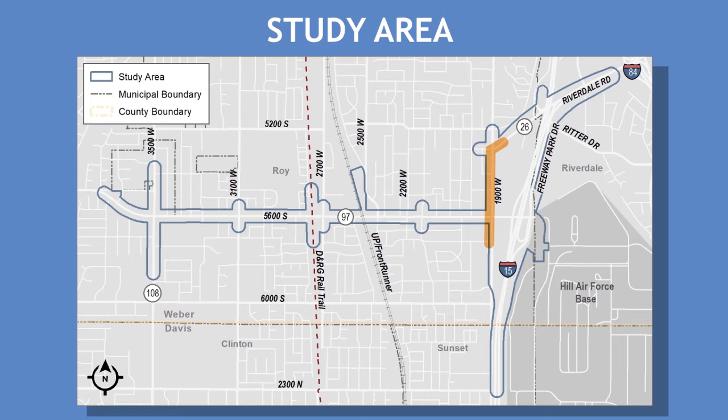The purpose of the project is to meet future 2050 travel demand on 5600 South and at the I-15 5600 South interchange, and to improve safety conditions within this study area. The project is needed because by 2050, major intersections such as 3100 West, 2700 West, 2200 West, 1900 West, and Freeway Park Drive would operationally fail during the AM or PM peak period if improvements are not made.

The project is also needed because UDOT crash data reports a high number of congestion-related crashes, and it is predicted that the number of crashes could increase by 2050 as traffic congestion increases. In addition, several pedestrian and bicycle-related crashes have occurred along the corridor. A goal of the project is to accommodate active transportation, or transportation that is powered by human energy, primarily walking and bicycling along 5600 South.

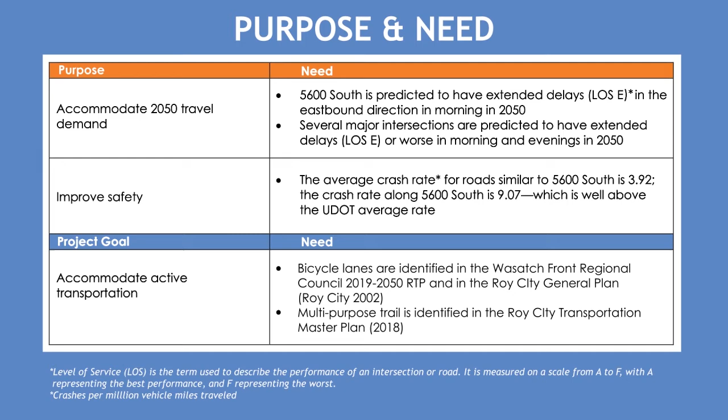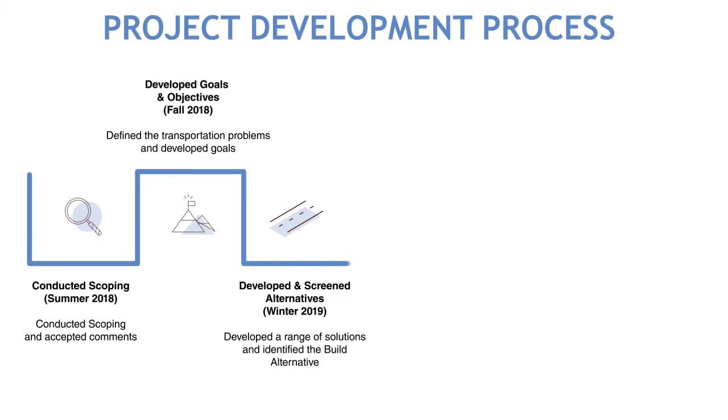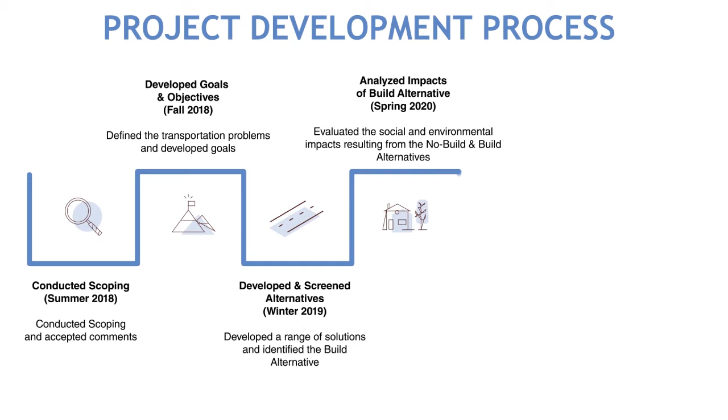Since the project scoping meeting held in 2018, UDOT has developed and screened alternatives to evaluate a range of design solutions. In fall of 2019, the team optimized the 5600 South alternatives to try to reduce the number of property and historic impacts. Identified a build alternative in winter 2019. Evaluated the social and environmental impacts from the build alternative and the no build alternative in spring 2020.

On June 23rd, UDOT published the environmental assessment for public view and comment. The public comment period is 30 days long and will end at midnight on July 23rd, 2020. Comments sent by postal service should be postmarked by July 23rd. The final environmental assessment and decision is anticipated in the fall of 2020. It will include response to public comments.

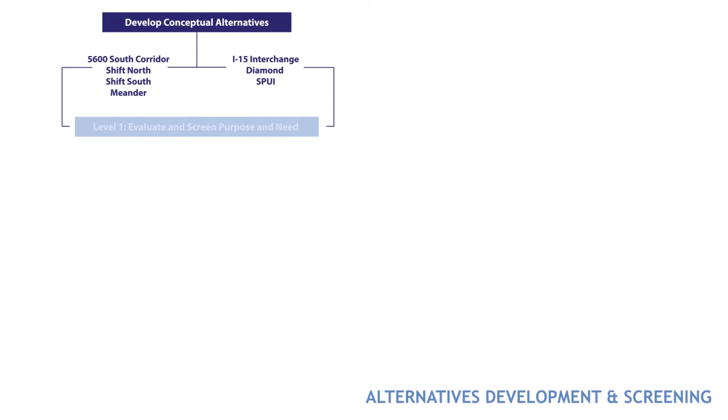UDOT developed solutions called alternatives based on the needs identified for the study area. These alternatives were screened against the performance criteria identified based on the purpose and need for the project. Level 1 screening evaluated the alternatives' ability to accommodate 2050 traffic demand and improve safety. Level 2 screening evaluated the remaining alternatives' ability to minimize Section 4(f) uses. We will define 4(f) uses later. Minimize acquisition and relocations, and ability to accommodate the project's active transportation goal.

In addition, UDOT evaluated a no-build alternative to provide a baseline for screening. The no-build alternative assumes the completion of all projects proposed in the Wasatch Front Regional Council 2019 to 2050 Regional Transportation Plan without improvements to the existing interchange or to the 5600 South corridor. You can find more details about this in Chapter 1 of the EA.

An evaluation of Section 4(f) properties was completed for this project. A Section 4(f) property is defined as publicly owned land of a public park, recreation area, or wildlife and waterfowl refuge of national, state, or local significance, or land of a historic site of national, state, or local significance. For this project, the historic properties were the focus of the Section 4(f) evaluation. This evaluation showed that there are no feasible or prudent avoidance alternatives to the preferred alternative. All measures have been taken to minimize harm to Section 4(f) properties.

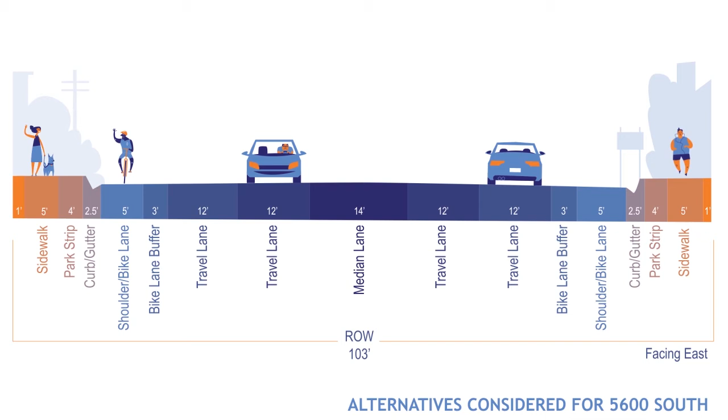All alternatives considered for the 5600 South corridor include the same cross-section as shown here, which includes an additional lane in each direction and added bicycle lane on each side of the road. Three alternatives along with the no-build alternative were evaluated along 5600 South.

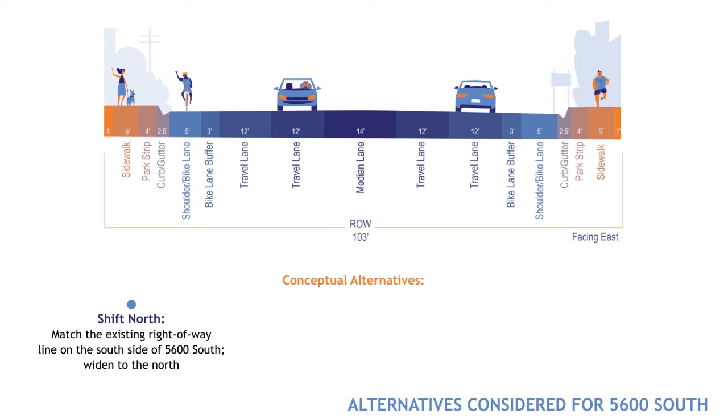The shift north alternative matches the existing right-of-way line on the south side of 5600 South and widens to the north. The meander alternative widens and shifts north and south to minimize property impacts to the extent feasible. The shift south alternative matches the existing right-of-way line on the north side of 5600 South and widens to the south. Using the identified screening criteria, UDOT evaluated how well each proposed alternative performed.

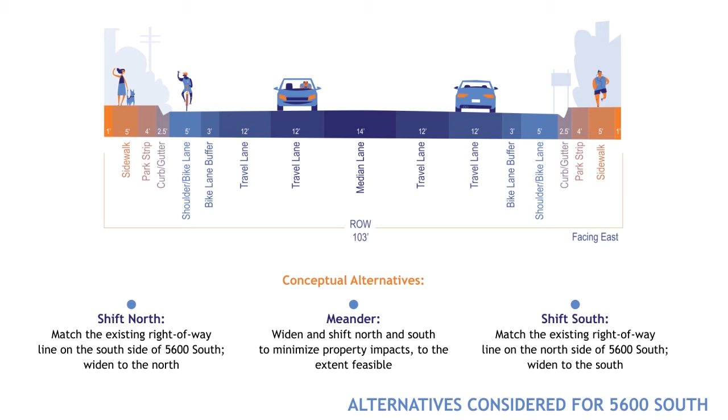The alternatives considered for the I-15 interchange include the no-build alternative, a diamond interchange, and a single-point urban interchange, or SPUI. The 1900 West intersection is also included in this evaluation because of its close proximity to the interchange.

The diamond alternative has the same configuration as the existing interchange, but would be redesigned with additional lanes to meet 2050 traffic projections and current UDOT standards. The ramps would also be extended to accommodate longer queue lengths and higher speeds.

A SPUI allows for opposing directional traffic by combining two ramp intersections into one. The SPUI alternative includes a collector distributor, or CD, system to Riverdale Road, the interchange immediately north. The CD system would eliminate existing weaving on I-15 by allowing northbound drivers to exit at 5600 South and continue north to Riverdale Road. A bridge is proposed over 5600 South to provide free-flowing traffic on the CD system.

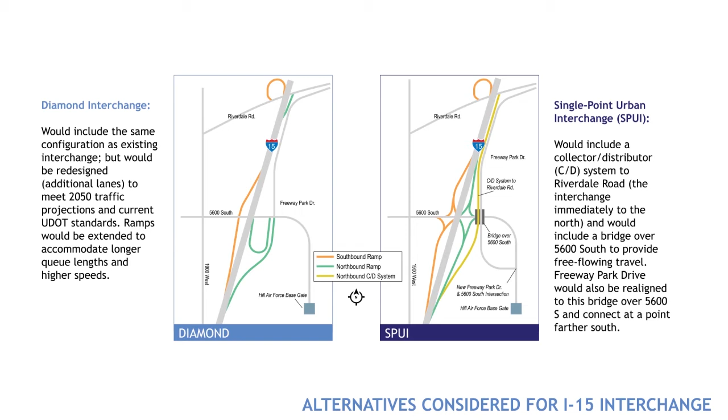Freeway Park Drive would be realigned over 5600 South as a flyover. The new intersection on Freeway Park Drive and 5600 South would be shifted to the north of the existing gate at Hill Air Force Base. The SPUI also includes pedestrian and bicycle connections between 5600 South and Freeway Park Drive.

Level of service, LOS, is the term used to describe the operational performance of an intersection or road. It is measured on a scale from A to F, with A representing the best performance and F representing the worst or failing performance.

Compared to the no-build alternative, travel time and intersection delays would be reduced by 20% along the corridor under all three conceptual alternatives. In addition, intersection level of service would operate at an acceptable level for all major intersections, with the exception of 3500 West or SR 108.

Therefore, the three conceptual corridor alternatives, shift north, shift south, and meander, met level 1 screening criteria and were advanced to level 2 screening.

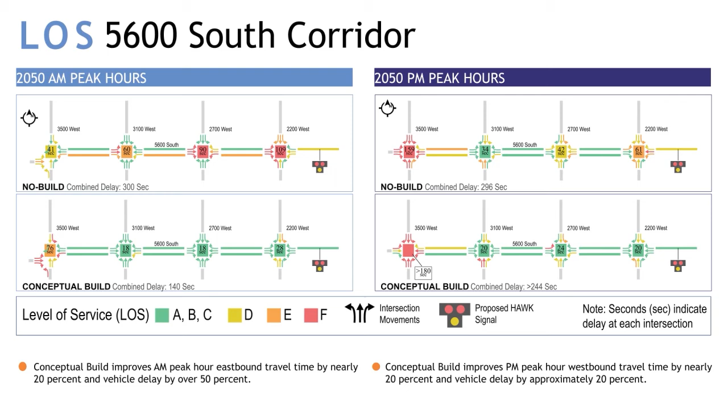The SPUI alternative would perform better than the no-build alternative and the diamond alternative because it would consolidate traffic into a single intersection instead of two closely spaced intersections. Additionally, the Freeway Park Drive intersection would be relocated further away from the interchange to solve traffic issues associated with the current closely spaced intersections.

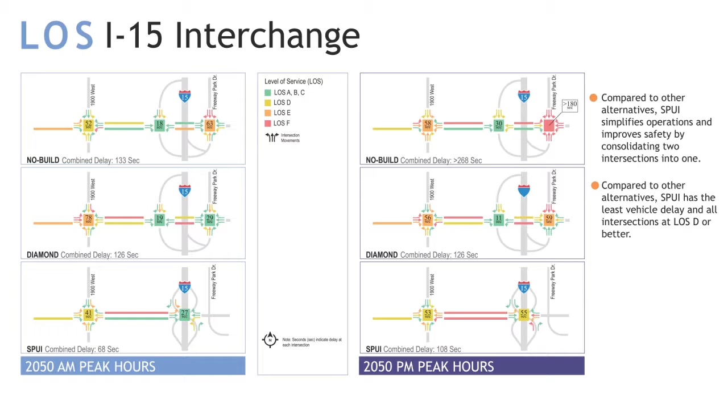The SPUI alternatives result in the lowest combined delay during the AM and PM peak periods. Under the three conceptual corridor alternatives, crash rates are predicted to decrease in each segment along 5600 South, compared to the 2050 no-build alternative. Crash rates are expected to decrease because congestion will be reduced.

The SPUI interchange is safer than the diamond interchange because it eliminates traffic weaving patterns on I-15 and uses a CD system allowing for free-flowing traffic, and in doing so reduces the number of conflict points, or places where crashes could occur.

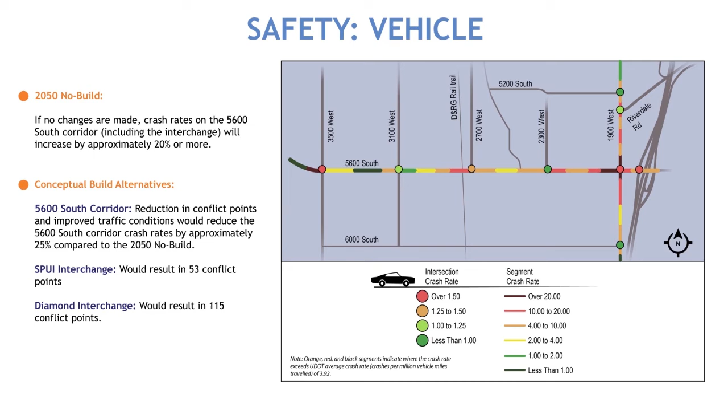The proposed addition of bicycle lanes on the north and south sides of 5600 South, a signalized pedestrian crossing or HAWK signal at the 2100 West intersection, and a grade separation of the D&RG trail crossing would improve safety conditions for all conceptual alternatives along 5600 South.

In addition, consistent bicycle lanes and sidewalks through the 1900 West intersection and continuing through the SPUI to Freeway Park Drive would improve bicyclist and pedestrian safety at the I-15 interchange.

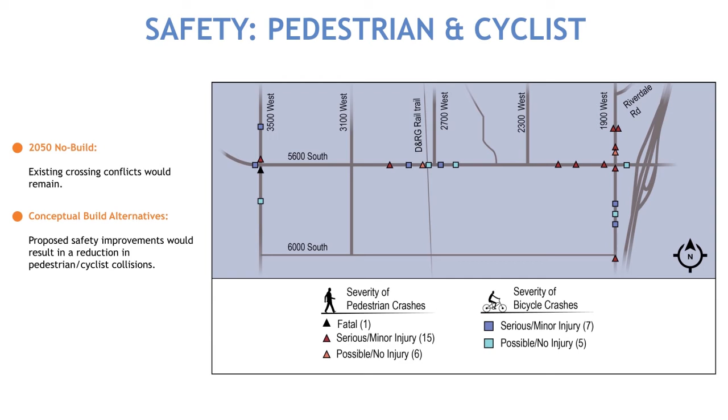Based off the information just summarized, the build alternative is a combination of the SPUI at the interchange and the shift south alternative on 5600 South.

The three conceptual corridor alternatives and a no-build alternative were evaluated at level 2 screening. The shift south alternative was selected because it would have the fewest number of Section 4(f) uses and fewest non-Section 4(f) property impacts, full and partial acquisitions.

It would result in the second lowest number of relocations and the lowest number of residential relocations. The shift south alternative also best met the active transportation goal identified for the project.

The build alternative was identified as the preferred alternative because it meets the project purpose and need, whereas the no-build alternative does not.

The proposed improvements under the preferred alternative include widening 5600 South from 3 lanes to 5 lanes, or from approximately 64 feet wide to 103 feet wide, adding buffered bicycle lanes, signed and striped, along both sides of 5600 South and through each intersection, adding median lanes with curb at intersections, adding dual left turn lanes at 3500 West.

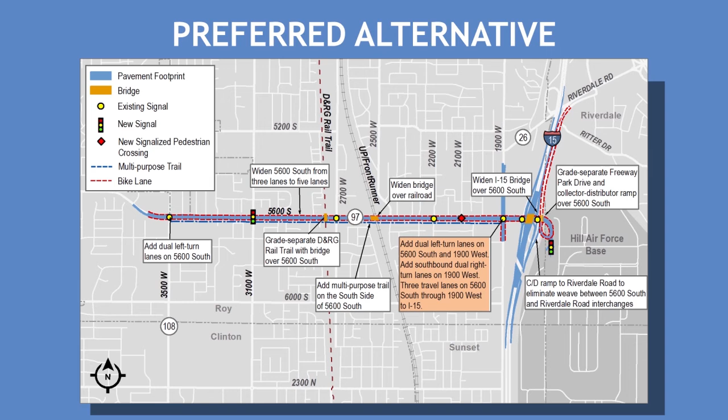This illustration shows what the 5600 South corridor would look like under the preferred alternative. The road would be 2 lanes in each direction with a center median, bike lanes with a 3-foot buffer between the travel lanes, shoulder, curb, gutter, park strip, and sidewalk.

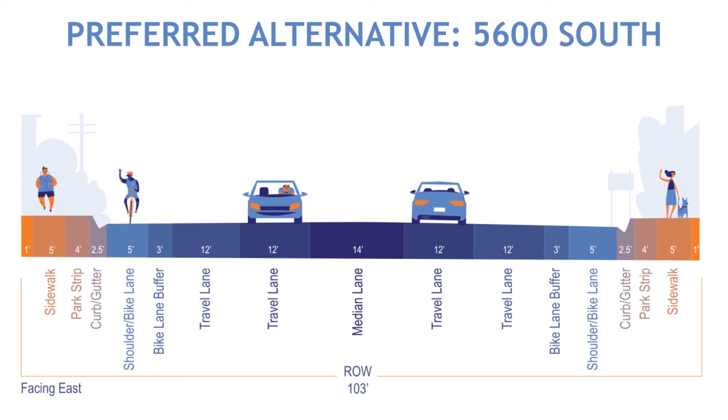It is anticipated the right-of-way acquisition along the south side of the corridor would result in surplus property. Surplus property is the part of the land that is not converted to a roadway facility after an agency, such as UDOT, acquires right-of-way for roadway improvement purposes.

UDOT elected to add the multi-purpose trail identified in Roy City's Transportation Master Plan to the build alternative as a result of this surplus. The multi-purpose trail would be located on the south side of the road and would replace the sidewalk where there is room. The multi-purpose trail would connect to the bike lanes on 1900 West intersection, continuing through the SPUI to Freeway Park Drive.

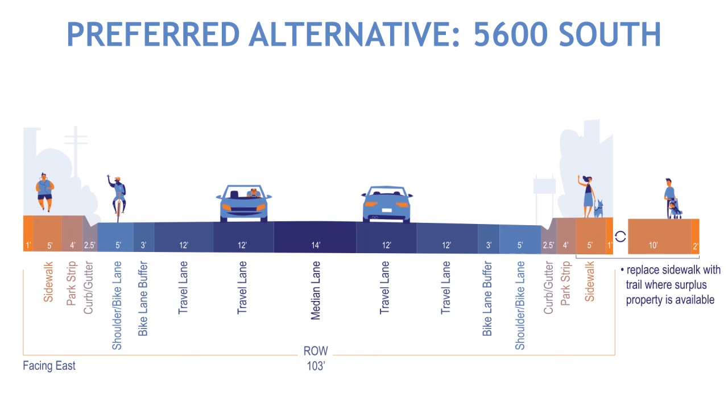The single point urban interchange, or SPUI, alternative is selected as the preferred alternative at the I-15 interchange because it accommodates 2050 travel demand and improves safety. The SPUI improves safety by eliminating existing weaving on I-15 associated with the close spacing between the 5600 South interchange and the Riverdale Road northbound off-ramp.

The SPUI allows northbound drivers to exit at 5600 South and use the new bridge over 5600 South to continue north to Riverdale Road. In addition, the preferred alternative includes pedestrian and bicycle improvements, including bicycle lanes and sidewalk connection from 5600 South to Freeway Park Drive, and signed bicycle lanes in the shoulders of Freeway Park Drive on both sides of the road.

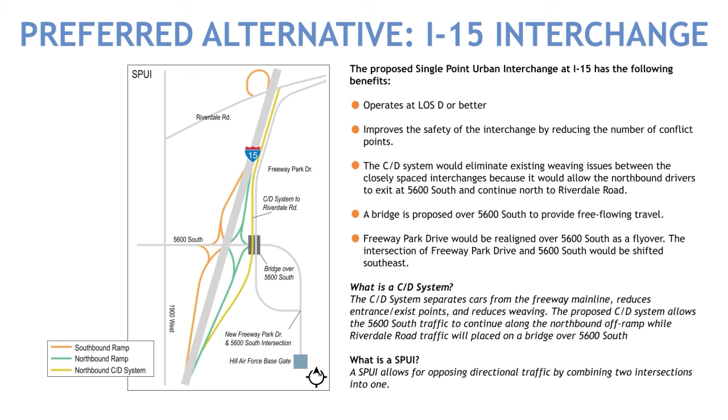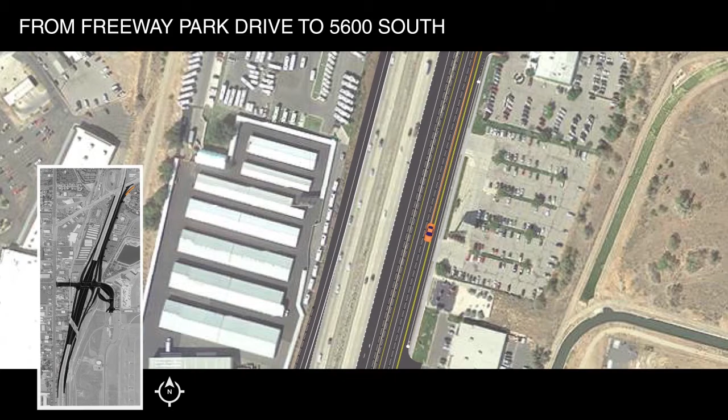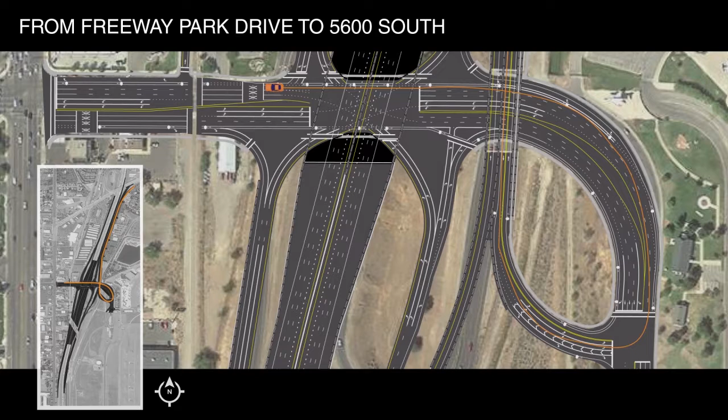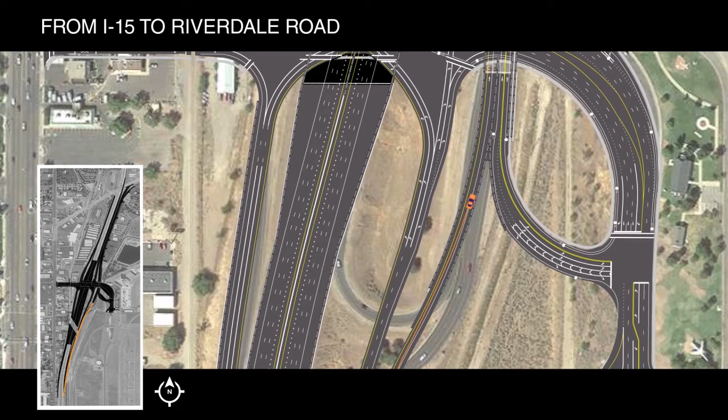This video shows how vehicles on 5600 South will access Freeway Park Drive, how vehicles on Freeway Park Drive will access 5600 South, how vehicles on I-15 can access Freeway Park Drive, how vehicles can use the CD ramp to access Riverdale Road, and finally, active transportation improvements throughout the interchange.

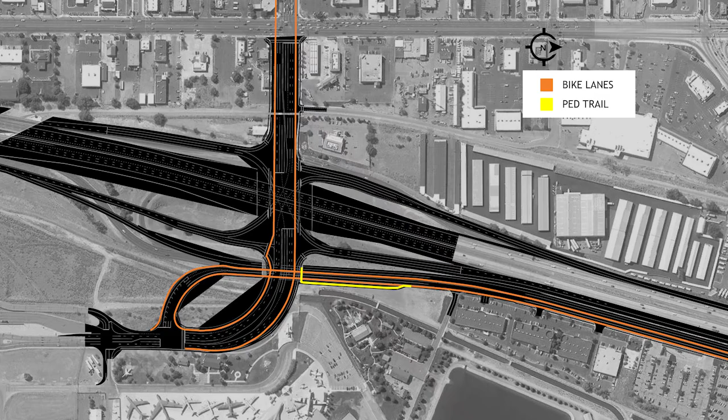The comment period is 30 days long and ends on July 23rd. All comments must be submitted by midnight on July 23rd in order to be included in the official project record and in the final EA.